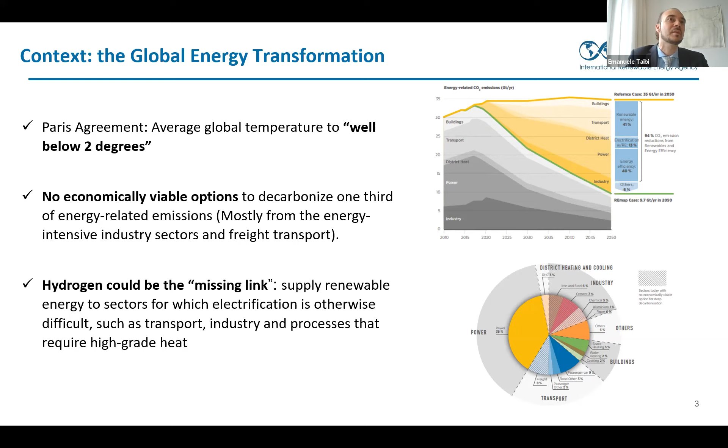The other side of this is that not all sectors are equally easy, or let's say some sectors are more difficult than others to decarbonize. And in the chart below, you see those with a dashed filling line. In particular, heavy industry and heavy transport are quite complex to decarbonize by directly electrifying them. But one of the angles to it is you can electrify the fuels. And this is how we're going to frame our work on hydrogen in the coming slides. Electrification of fuels, meaning using renewable power to produce hydrogen or derivatives from hydrogen that can be used to decarbonize difficult sectors.

Just to set the scene, hydrogen is not new in the sense that this has already been an established market. There is a market for hydrogen, in particular ammonia for fertilizer being the largest, but many other uses, and as you can see, they're mostly in industry. This is why also there is an opportunity for industry to be somehow a low-hanging fruit there,

given hydrogen is already utilized today. The main element there to show on the right-hand side is that half of the hydrogen today is produced from steam methane reforming and natural gas. About a third comes from oil and about 20% from coal, and the remaining 4% is electrolysis.

And what we are suggesting here is that for hydrogen to be a way to decarbonize the energy sector, that 4% has to go towards 100%, or let's say it has to significantly increase, while at the same time the total size of the pie should also increase several fold. So at the moment we're talking about around 8 exajoule, and if we want to go at scale, we need to increase that several times, up to an order of magnitude, depending on the different scenarios.

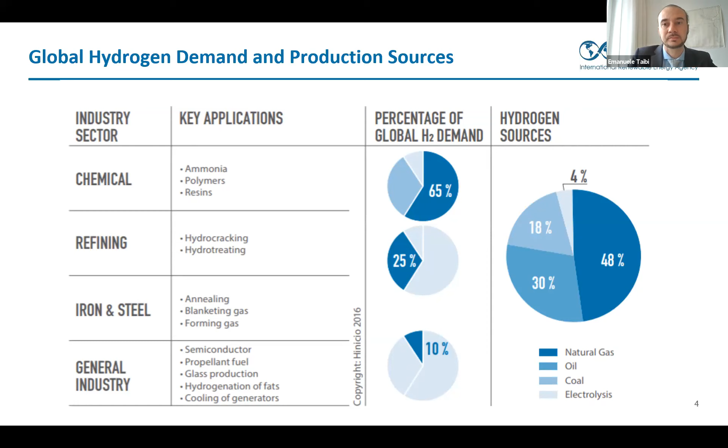To give a bit better overview of where hydrogen can go once it's produced, our focus is somehow on the first part of the picture, so the yellow part. We are a renewable energy agency, so we look at it as a vector for renewable electricity to go into end-use sectors. But of course, the complexity of hydrogen is supply chain as well, not just production.

So once you leave the electrolyzer, you can go through many different routes, and there could be also other sources of hydrogen beyond this, for instance, from biomass, or of course, fossil fuel with CCS. But once the hydrogen is produced, there are very diverse ways of getting it to the end users, and we will touch upon that a little bit later.

But essentially, decarbonizing transport has the advantage of being able to use fuel cell electric vehicles, which are significantly more efficient than internal combustion engines. Decarbonizing industry, as there are limited alternatives to hydrogen to decarbonize industry. And then finally, decarbonizing the gas grid.

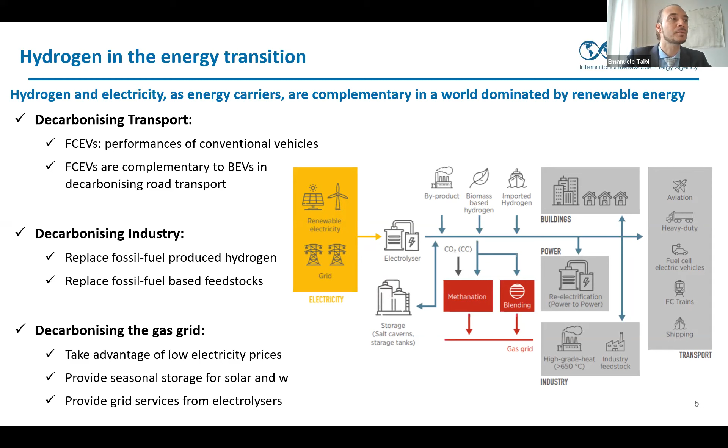There is a significant interest from the gas industry, a renewed interest compared to the one, let's say, of 15 years ago, looking at the opportunities of utilizing existing infrastructure for distributing green hydrogen or green electrofuels using the existing infrastructure.

This is the report we launched in September. You can access it for free on IRENA's website. Some of the recommendations, I will not have the time to go through all of them, but just some of the recommendations that we put forward in the report is to really start from the low-hanging fruits and start building scale, because scale is key to reduce cost.

And at the moment, the main challenge on hydrogen is not so much technical, but is really on the cost competitiveness with incumbent fuels. So there are several alternatives with which hydrogen will compete in some sectors and limited alternatives in others. And the point is to get first to scale, reduce cost, and then other sectors will open up.

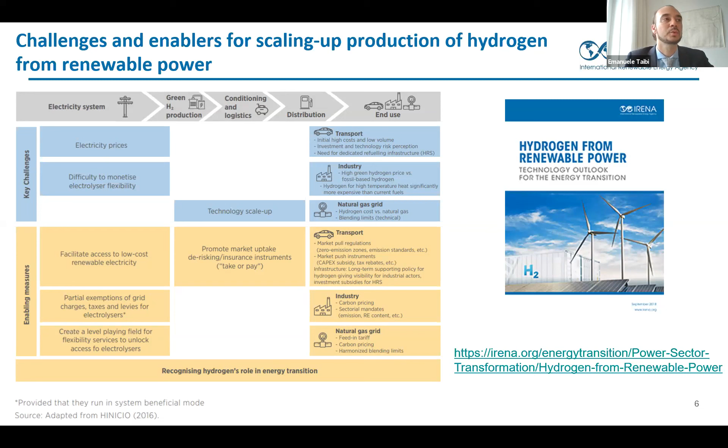We had an event at the IRENA Innovation Week where we launched this report, where we had experts from different organizations and institutions discussing with us their view on hydrogen for the forthcoming decades. And we also had a poll where we discussed with the participants in the session. So over 100 people were there.

And we tried to see how the discussions in the session influence the perception of hydrogen, because we noticed that there is a very diverse perception in different stakeholders about the role of hydrogen in the energy transition. And we try to run the poll before the session and after the session to see if the discussion changed a little bit the perception.

And somehow it was a renewable event, so most people, both in the medium and longer term, 10 to 20 years from now, they saw hydrogen as a way to integrate more solar and wind into the energy system. And we, of course, agree with that view.

Additionally, after the session, there was an increased emphasis on the role of hydrogen to decarbonize heat in the next 20 years, as opposed to industry as it was before the session. And finally, more and more people got convinced that this is a way to get solar and wind electricity into end-use sectors.

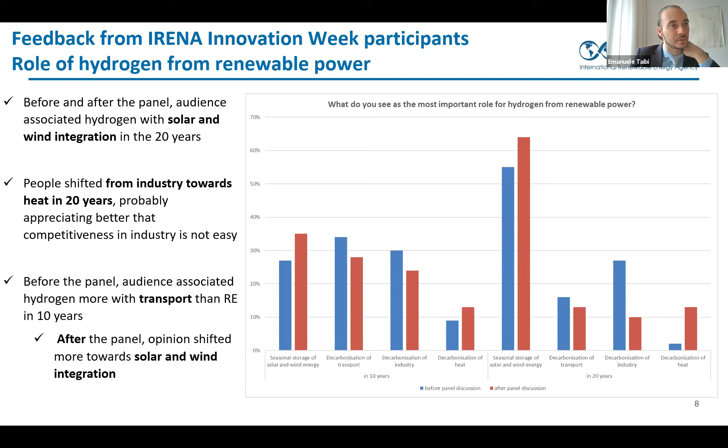A couple of words about supply chain. One of the pathways here is, of course, to start from scale and then look at a diversity of ways to distribute this hydrogen. So close to demand, centralized distribution system using, for instance, the gas grid, and then intercontinental shipping. And we see this as two quite complementary business models.

So close to demand with significant opportunities to minimize supply chain costs, however, with somewhat more expensive grid electricity, or going to the best locations in the world where you can get lowest cost renewables, no grid fees, but then you would have a more expensive supply chain to get the hydrogen from where it's produced to the areas where it's demanded.

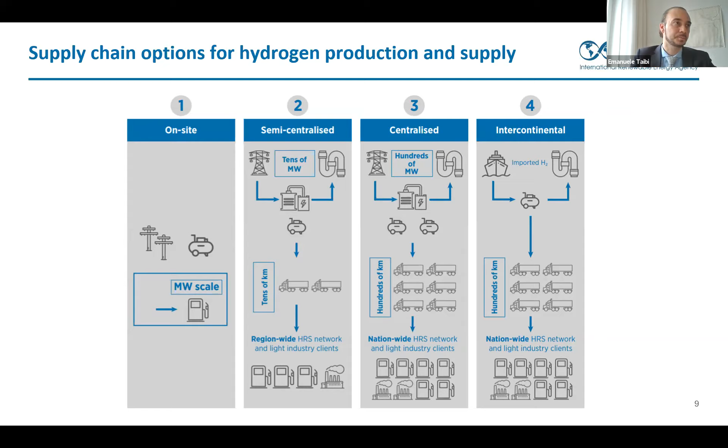Another pictorial of that process: best renewable resources going through electrolyzers, producing hydrogen, and then additional costs would come from handling, storage, shipping, and of course, converting the hydrogen back into a usable form and delivering it to the end users.

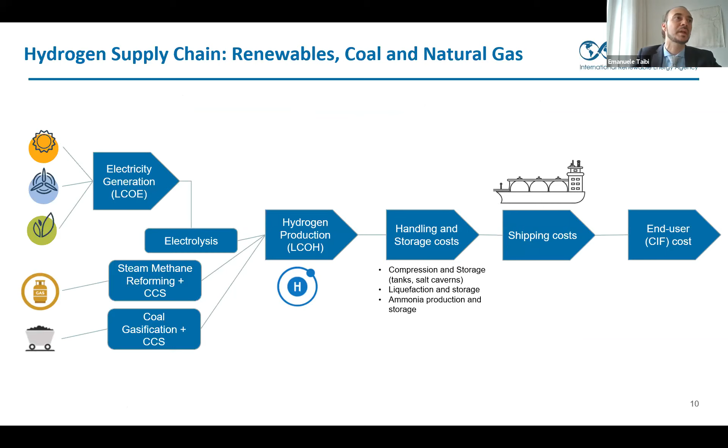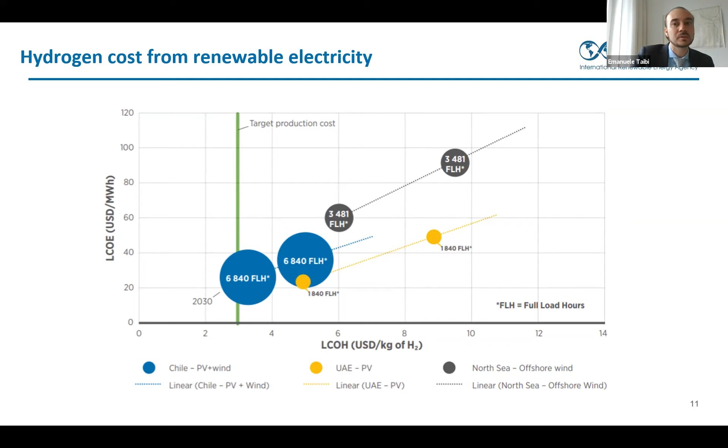Now, we saw more recent numbers, and that's why we're redoing some of the economics, and we're breaking them down with different supply chain options. It seems to be quite promising. So what we're trying to do now is to keep an eye on recent developments and new studies and new technology advancements, and trying to see what are the early opportunities to get scale.

Ammonia is a well-established commodity, shipped widely already today as a base feedstock for fertilizer mostly, and liquefied hydrogen is not there yet. However, we have seen in recent years the surge in liquefied natural gas trade, and although more expensive than pipelines, this has been growing steadily over the last decade, and that could be a precursor of a liquid hydrogen market. Technology, however, is still in early stages compared to LNG.

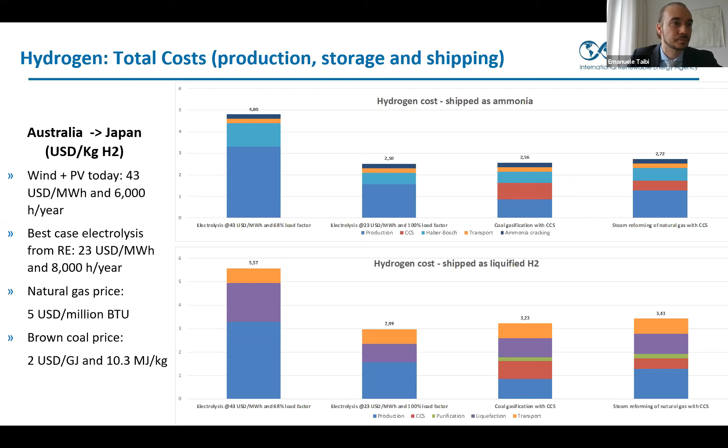In conclusion, a few key points. There is really a case for strengthening the economic case for intercontinental hydrogen trade. So areas where there is no electricity demand, but excellent renewable resources could be exporting, including current fossil fuel producers that have some of these excellent solar resources could be considering that as a diversification option.

At the moment, it's still cheaper to produce it as it's being produced so far from fossil fuels. However, the economic case for hydrogen from renewable power is getting better and better. The concept of dedicated renewable energy plants is, again, the most promising in the long term. So in the short term, grid-connected large-scale electrolyzers are somehow more practical as they're closer to the load.

But in the long term, there is significant renewable potential that is untapped in different parts of the world, and this could create a global market. There are a bit of uncertainties regarding the applications. So, for instance, Asia seems to be very keen on transport, Europe as well. Industrial applications are considered where industry has a significant role in terms of energy demand.

In terms of feedstock, ammonia is already produced at scale today, and it offers the early opportunity of producing ammonia from renewable hydrogen. And then finally, some of the heavy industry, in particular steel, seems to offer interesting alternative pathways, such as, for example, using the hydrogen to produce directly reduced iron and then export the iron instead of the hydrogen. We are doing some work in this space, and we see some interesting economic opportunities where shipping a commodity might be better than shipping a fuel.

I will start now to talk about the large-scale water electrolysis. This is made by ThyssenKrupp Uhde Chlorine Engineers. And I already introduced myself as spending almost all of my professional life in the hydrogen business and hoping for this moment to arrive.

What are for us, I think, the key values for green hydrogen? First of all, we all know what is coming on after the COP21, where I participated in Paris, that there is an issue with the CO2. And Emanuele also told you that there is a big challenge for our humanity to cope with the CO2 emission and, in fact, the climate change. And the good thing is that at this moment, renewable energy is becoming very economic and competitive compared to fuel.

The second point, I would say, we need to use our legacy. Here we can talk about the gas infrastructure, which is one strong legacy we have in different countries, but it's also something that can be valorized in the future development of the energy transition. We see also, on the third bullet point, that there is a big pressure on the local emission targets. Big cities, what happened with the Dieselgate, etc. It pushes industry to evolve and to change.

And the fourth point is we need to supply energy in the different countries, and there's a diversification of energy supply, especially for me, renewable. And I think it's really the good time to do it. And when people say hydrogen is the future, my answer is always no, this is today. It's not the future.

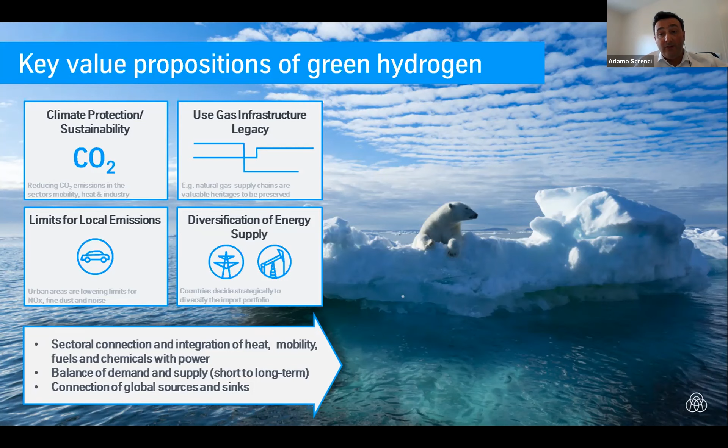Because today we can make it happen, and have the intersectoral connection, as we said, we are talking about heat, mobility, fuel and chemicals and power. And then hydrogen can make the link in all this energy transition. It can also give a very strong service in balancing demand and supply, because with the development of renewables, you know that it's important to balance demand and supply. And you can also go from energy to all the utilization.

I always take this nice chart from the Hydrogen Council. Maybe you are aware of it. It's used in different presentations to show the power of hydrogen coming from renewables. You can bring energy, store energy and use this energy in different applications.

You can see 4, 5, 6, and 7, which are transportation, industrial application, heating, and feedstock, because we need hydrogen as a chemical to produce all the other chemicals. And again, Emanuele was talking about 8 exajoules to 80 exajoules in 2050. These are the numbers we are looking at.

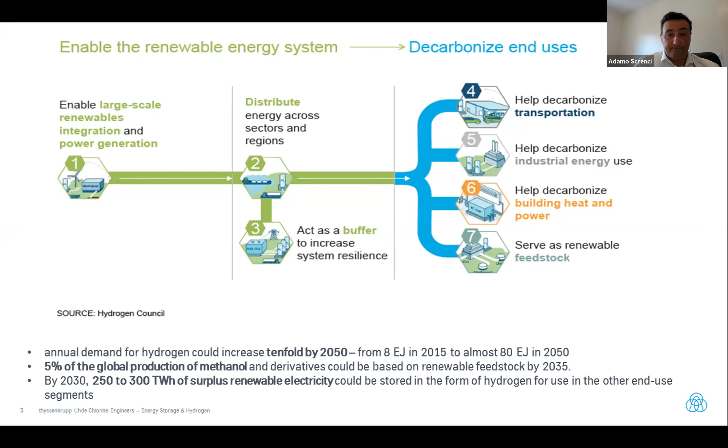Just to let you know, we are the world leader in ammonia plant delivery, one of the leaders in methanol, and in synthetic natural gas. But I will focus today on hydrogen.

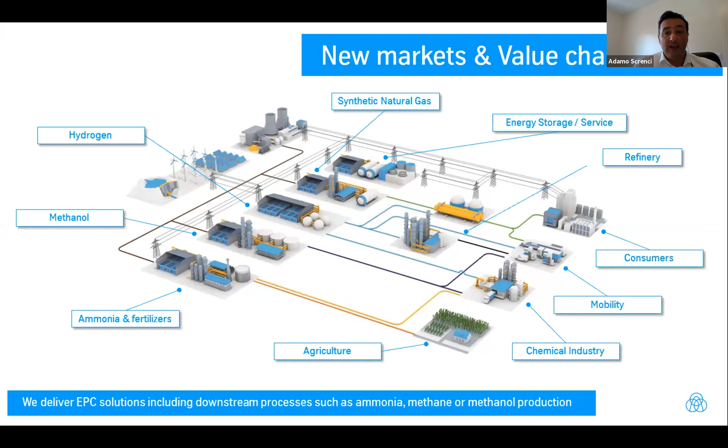As an introduction, a few words about ThyssenKrupp, because maybe not everybody knows ThyssenKrupp. 42 billion euro sales, 160,000 employees that make it happen, more than 200 years of heritage, present in close to 80 countries. So it's really a multinational team. Myself, I am working in a smaller division, 25,000 people, building plants. Plants for plastics, chemicals, methanol, ammonia, etc.

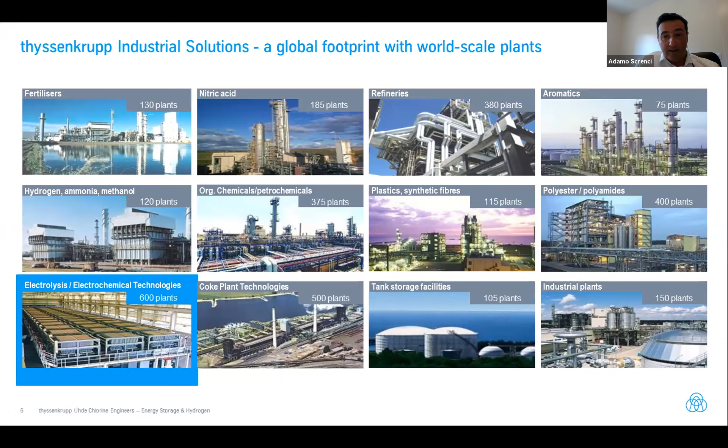And you see here also electrolysis. This is a small 200 megawatt electrolyzer, for example, to show you the size of equipment we can deliver. In electrolysis, as you have seen before, 4% of the hydrogen today is already produced by electrolysis. 50% of that market is from ThyssenKrupp.

Today, producing in big plants more than 42 million tons per year of chlorine, which is already more than 10 gigawatts of electrolyzers installed in the world, representing close to 1 million tons of hydrogen per year produced and sold to the typical gas companies you may know: Linde, Air Liquide, Praxair, and Air Products.

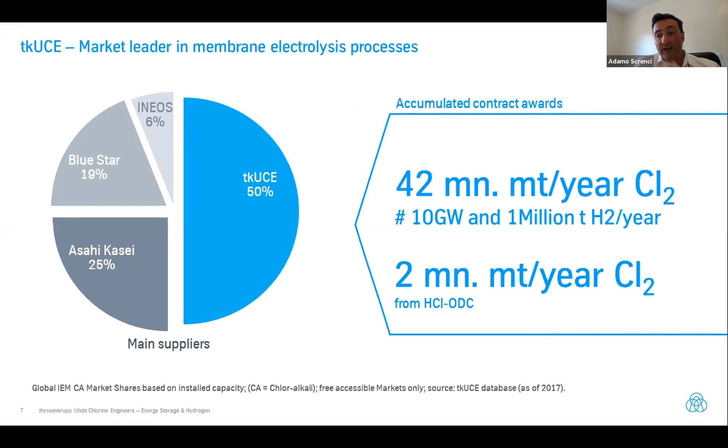The key element is electrodes. Of course, the electrode is the heart of electrolysis, and the development to optimize this electrode is important, because on the planet you have a lot of big names in electricity. GE, Schneider, ABB, Siemens are very strong companies in electricity. You have big names in chemicals, Dow Chemical, BASF, Bayer, etc.

But when you go to electrochemistry, when you play with high current, high voltage, nice molecules, hydrogen, chlorine, or oxygen, you find the world is smaller. And together with our team at De Nora, which is the leader in catalysts, we are close to 2,000 engineers dedicated to electrochemistry, by far the biggest team in the world.

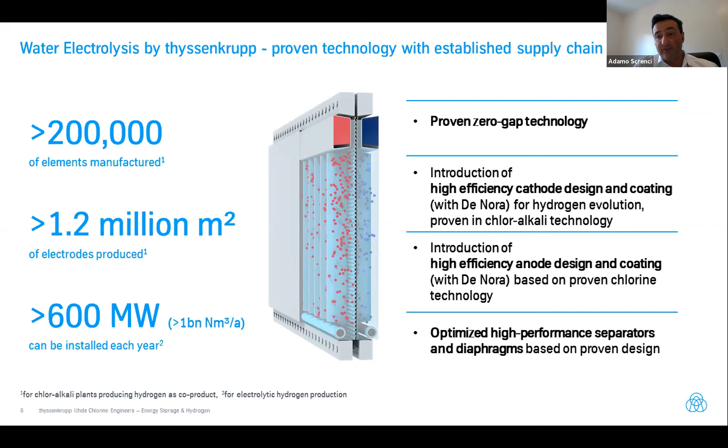So we developed and optimized the electrochemistry for pure hydrogen production, with, of course, zero gap technology, high efficiency cathodes, separators and diaphragms, etc. And what is important, we work on an existing asset which allows us to supply today, every year, more than 600 megawatts of electrolyzers. This is already starting to be an interesting number.

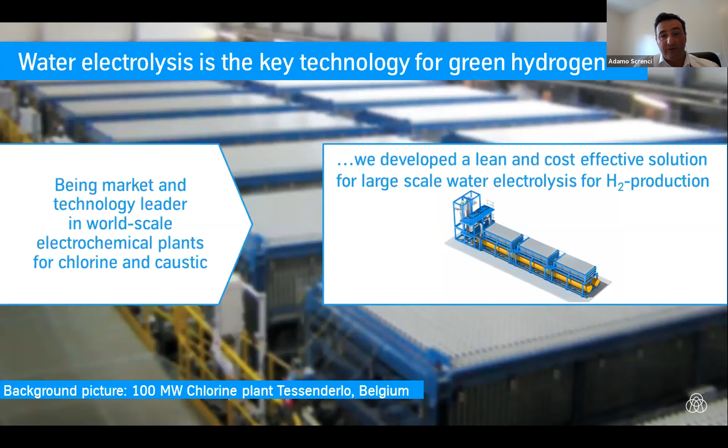Okay, so we have also been working in the last 10 years to develop a standardized product, because it's important to be cost competitive, close to the market, and to decrease the capex. And we have developed a module. You see the picture of the module, and this module allows you to be very footprint efficient, less than 2,500 square meters for a 100 megawatt electrolyzer, which is top in class in the world compared to any other supplier.

Standard modular design to be able to ship everywhere in the world and to limit the site work. 82% stack efficiency, also best in class today. 77% full plant efficiency on the electrolysis to produce hydrogen, purified and compressed. 98% availability, which is also key. Lifetime of more than 30 years.

No stack exchange during the whole lifetime, just recoating, which has a very good impact on the environment and the total cost of ownership. Of course, high purity, fully automated. Why fully automated? Because it's coming from the chemical industry, where you don't want to have people on site. Safety is number one. So it's totally unmanned, full control and unmanned.

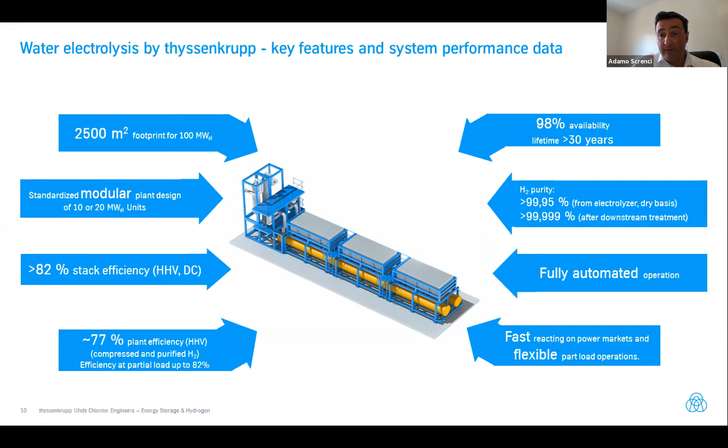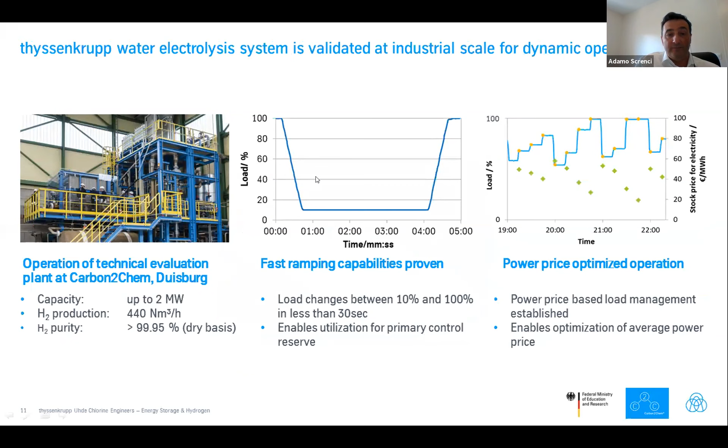And very fast reacting to the power market and flexible for partial load to cope with fluctuation of wind and solar. This has been demonstrated also. We have a small demo, 2 megawatt, really small, but at least we can play with it, where we tested all those parameters: ramp up, ramp down, lifetime, etc. It's the same stack as used in big industrial scale, but I will go faster.

Again, modular design. One key point also for the building here: the electrolyzer does not create any ATEX area. We have specific design parameters that allow us not to be considered as an ATEX zone. So this will divide by 2 the building cost, the infrastructure cost, and the maintenance cost. So it's really a key component that we don't create any ATEX zone, for the ones that are familiar with hydrogen, which is a key issue.

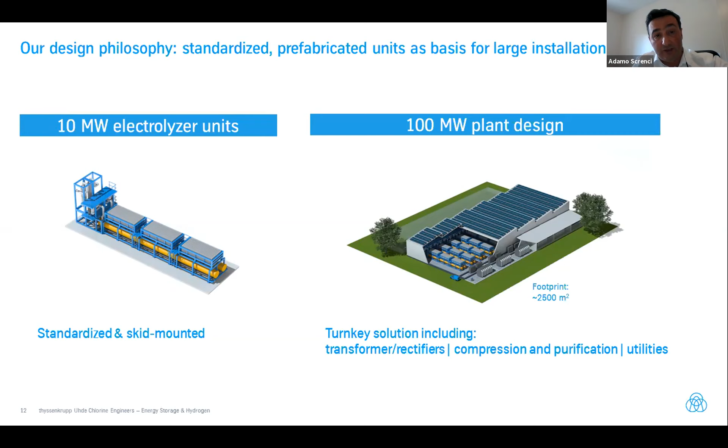A few nice numbers to discuss, because during the last years, everybody's trying to find the right business case. The business case is a tricky thing, because of course we want to decarbonize the world. Of course we want to reduce the CO2 emission, all that as a personal being. But we are also part of an industrial organization. It has to be a business. And we see now we are close to getting business cases that are running.

And we experimented hundreds of different business cases: peak shaving, load shifting, storage of hydrogen, mobility, ammonia, methanol, SNG, all that. There are a lot of parameters. How many hours is the electrolyzer going to work? Is it base load? Is it partial load? And what is important to evaluate in that field? Is it the CapEx or the OpEx? Of course, it's easy to understand that if you have a limited number of hours, you need to have a lower CapEx, and the CapEx has an impact.

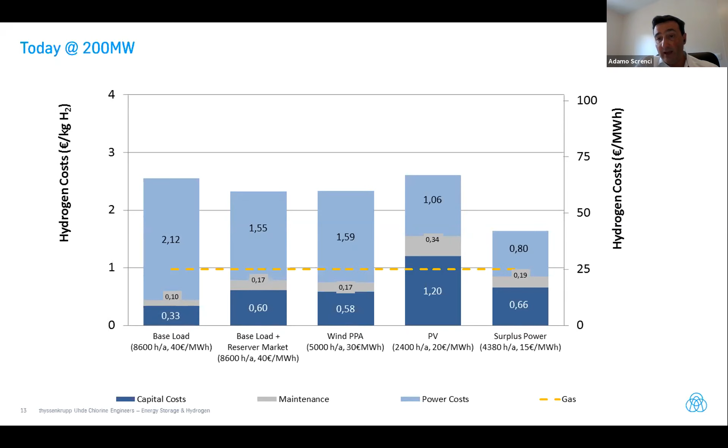I wanted to share with you also a nice slide I found in the Netherlands, because we always ask, what is more convenient to move, gas or electricity? And I took these two lines that connect the Netherlands and the UK, the BritNed and the BBL. These are two lines of approximately 200 kilometers each, installed in 2009 and 2011, if I remember. The CapEx was approximately the same, 500 million each, to connect the UK and the Netherlands.

The BritNed has a power capacity of 1 gigawatt, and each year you transport 8 terawatt hours in this cable. The BBL has a capacity of 15 gigawatt, same CapEx, and transports 120 terawatt hours per year of energy from the Netherlands to the UK. So I give you the message. Is it better to transport electricity, electrons, or chemicals? I would say, if you look at the CapEx and the time, chemicals are much cheaper to transport. I think everybody is aware of that, but it's good to see it in the face.

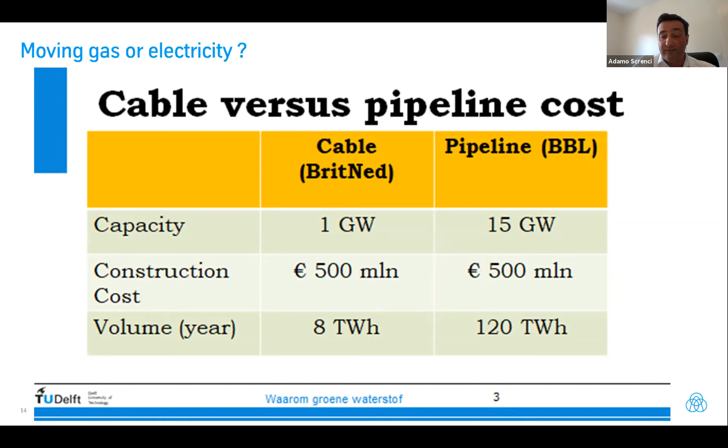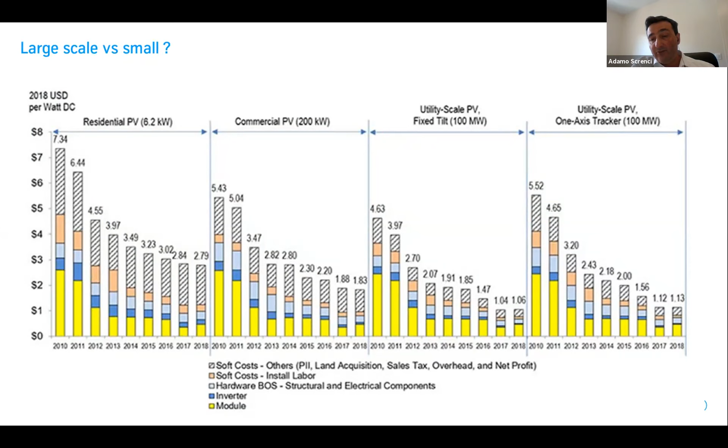The second one is, do we look at decentralized, more small scale, or big scale? These are curves from NREL, the National Renewable Energy Laboratory of the US, that show the CapEx and cost of residential PV at 6 kilowatt and the big one going to 100 megawatt. And you see that there is no discussion. Bigger is cheaper. That's why we see these huge solar plants.

And we were talking about Australia and Chile. Of course, there is one big industry, one place where we can develop more renewables. A 5 gigawatt plant will cost much less. And also, please consider, you don't have a refinery or a steel plant at every corner of a building. You need to be big to be economic.

Same for wind. Now one windmill can produce 12 megawatt. I've seen that there is one at 15 megawatt now coming in one single windmill. So big makes it cheaper and makes it competitive. Same discussion when you want to transport this amount of material. If you want to do this with a pickup, it will take some time and some money. It will cost you more. So this is always a discussion between mass production and economy of scale.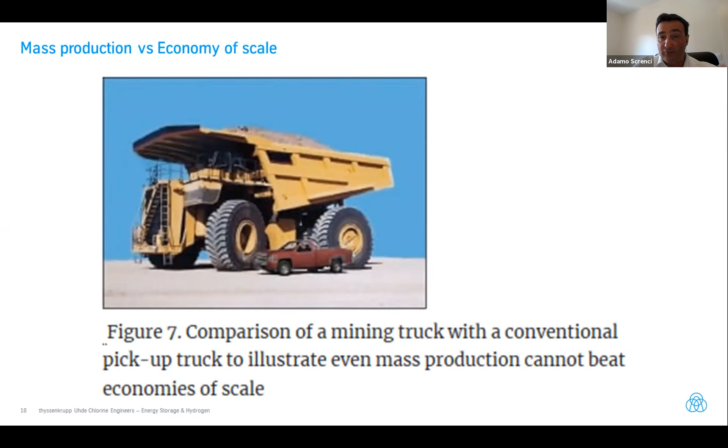And at a certain moment, if you want to be big, and we are talking about energy, you have to be in a large scale, really. This is what we are aiming. That's why our target is to do electrolyzers in the range of minimum 500 megawatt. This is our target in the next years. And to be competitive with gas, with CCS.

You see that if we put on top of the gas the cost of CCS or CO2 cost or whatever, you increase the cost of your gas, of course, and doing so, the hydrogen can be competitive, close to be competitive. At 2 euro per kilo, in some areas, you can be competitive with this gas market. And this opens a huge amount of applications, like ammonia, we were talking about steel. I give you an example.

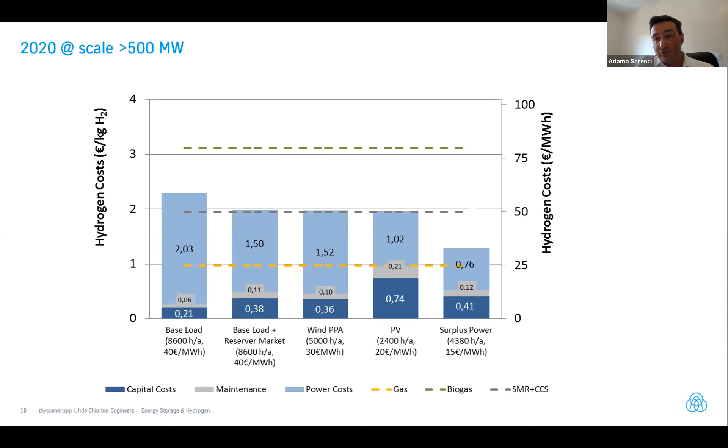We are now on one project in Australia, a small one, 50 ton per day ammonia with a 30 megawatt electrolyzer. One small project is equivalent to putting 60,000 Toyota Mirai on the street. So can you imagine how much you have to do as investment, filling stations, to put 60,000 Mirai on the street? It's a huge, huge effort. And this is done in a small scale plant of ammonia.

Of course, we are very active since I joined ThyssenKrupp 1.5 years ago. We are now a steering member of the Hydrogen Council, but also of the Ammonia Energy Association and also the Green Ammonia Association in Japan. We joined recently. That's it, in few words.

I would say what is key is that we have today a supply chain to deliver 600 megawatt per year, easily expandable to 3 gigawatt per year. We already have more than 10 gigawatt installed, which is more than 1 million ton of hydrogen per year already produced. Electrolysis hydrogen. Thank you, everybody.

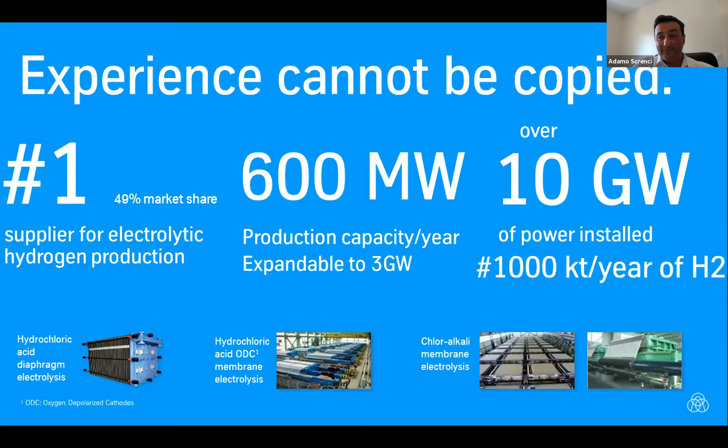Thank you, Adamo, for your presentation. Very interesting. We have a number of questions that have come up from your presentation, and we'll start answering them shortly. But there seems to be one question I'd like to ask first: it looks like the key for hydrogen to be adopted widely is for the cost to be competitive with natural gas, and for that you need to get scale. So what's the key? Any ideas of how we might reach large scale adoption of hydrogen, which will enable cost reduction? I don't know who wants to go first.

Yeah, I can start, and then of course, Emanuele, you can give your thoughts. I think green hydrogen is coming only for two reasons. There are two levers: cheap electricity and climate pressure. If you don't have that, it doesn't work. Because, as you showed, only 4% of the hydrogen was produced by electrolysis in the past, because it was maybe in some small places convenient. So we need these two levers: real policy regarding climate and cheap electricity that make it possible.

We didn't move from coal to oil because it was environmental. It was easier to use, it was more friendly, it was more practical. And same today, the renewables are pushing. And this is why I believe in green hydrogen coming with more renewables. This is my... Okay.